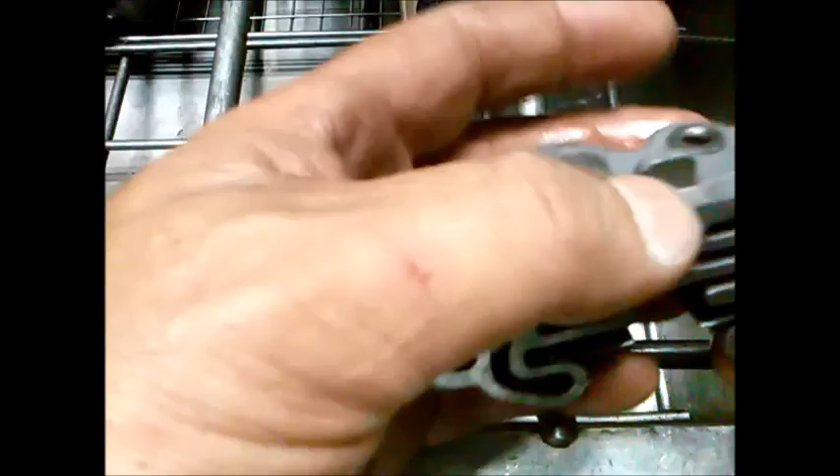Okay, we've got the governor valve now.

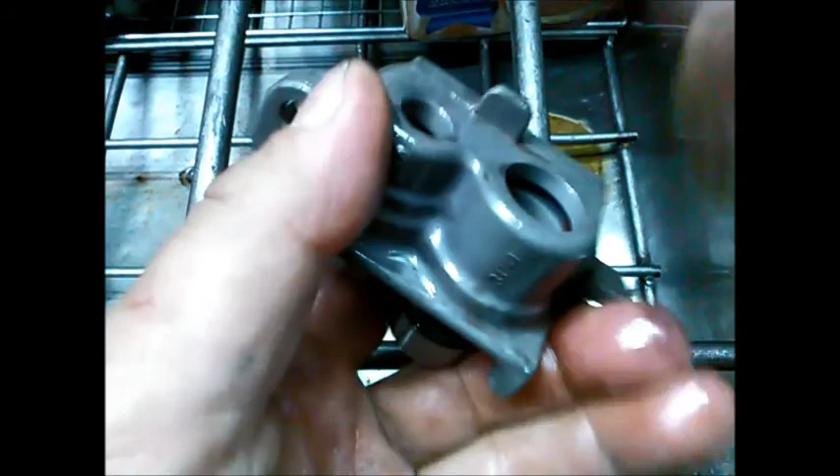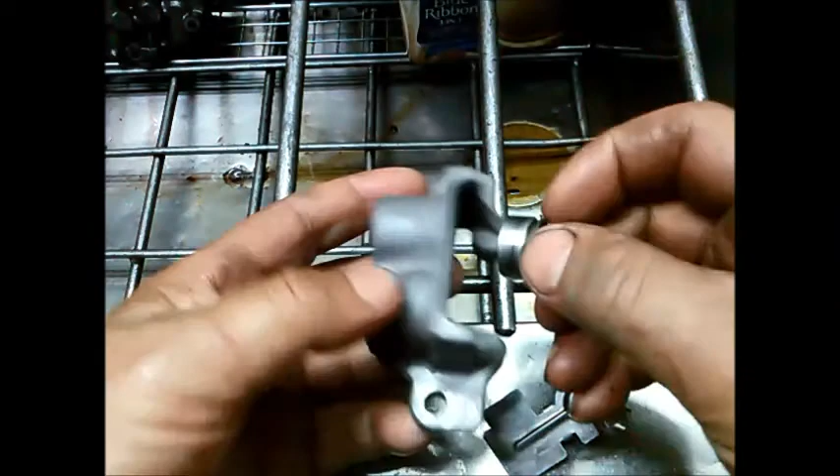Okay, I've washed the governor valve, and we've made sure that's nice and flat as well. We're just going to put the valve in backwards and just see how it travels.

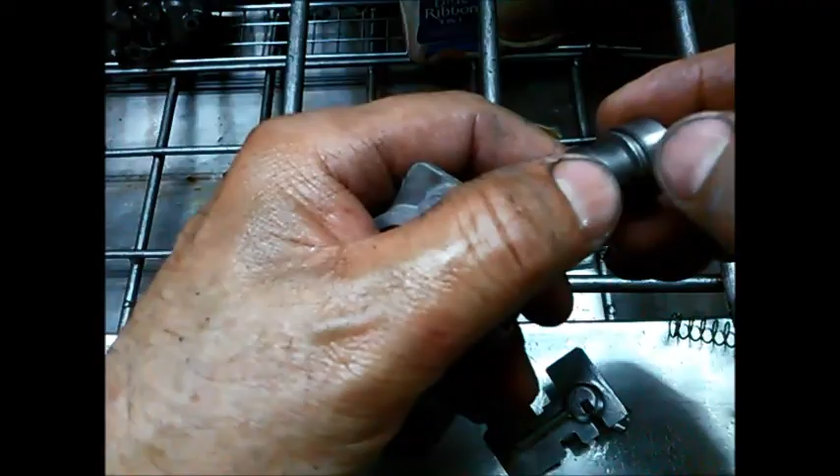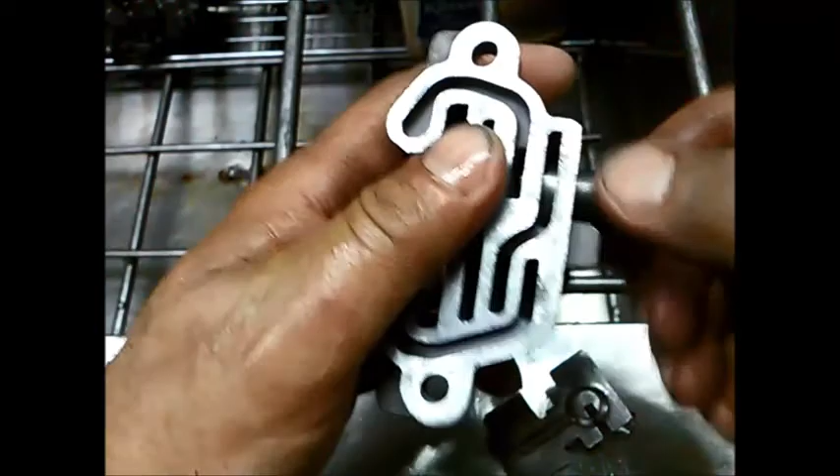There's a little bit of resistance there, so I'd say there's a little burr there. This little edge here makes a little burr on the inside, so it's important for the valve to knock that burr off. And there we go, let's see, it's going much easier now.

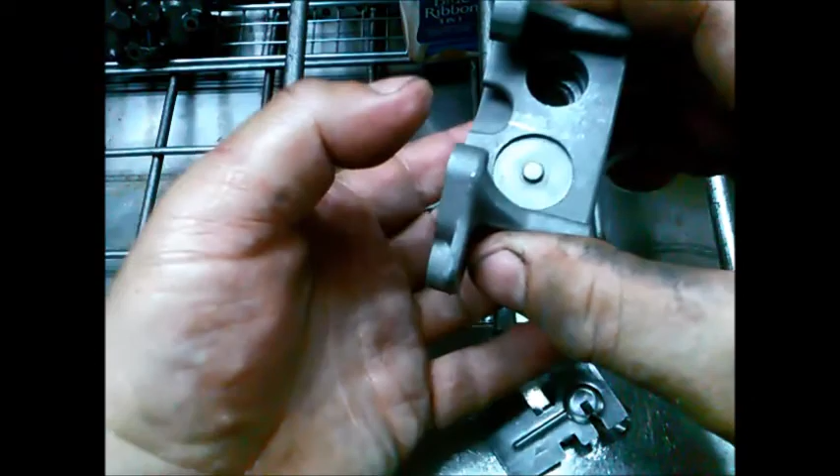Now that valve doesn't come out very far. You can see where that plate comes up to, so it only comes up to about there. But it's very important that it's got nice sharp edges there. If you end up knocking that off, I've heard of people getting a bit of sandpaper or wet and dry and cleaning it up if it's sticky.

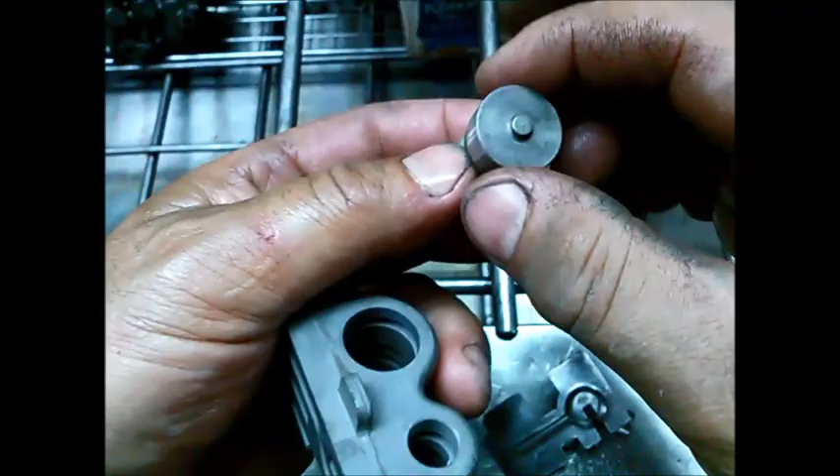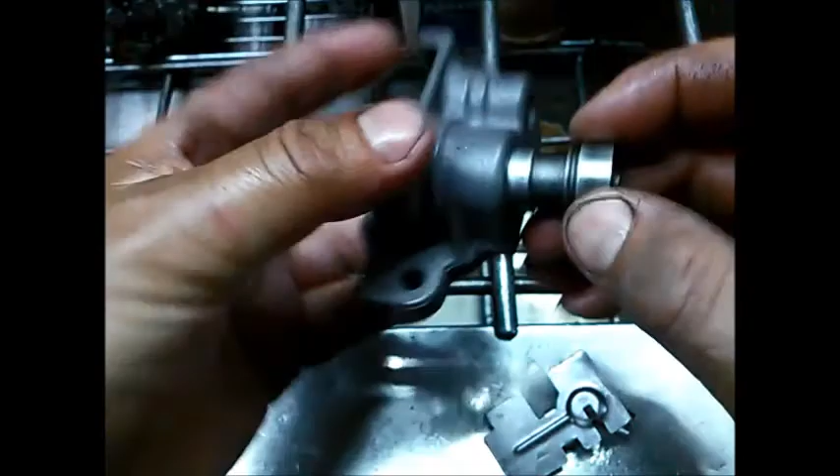That's the incorrect way of doing it. You get some very, very fine grinding compound, and you just put a little bit on the valve together with some solvent, and you work it through. But it's even better to not use any grinding compound, just work it through on its own step there. You can see it's a precision fit, don't force it in.

That valve's really good. Now we're just going to do the other one, that's the secondary valve. Same thing.

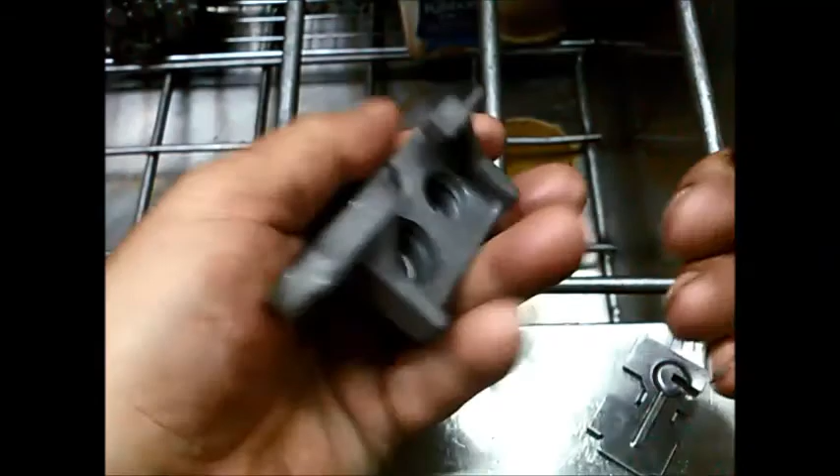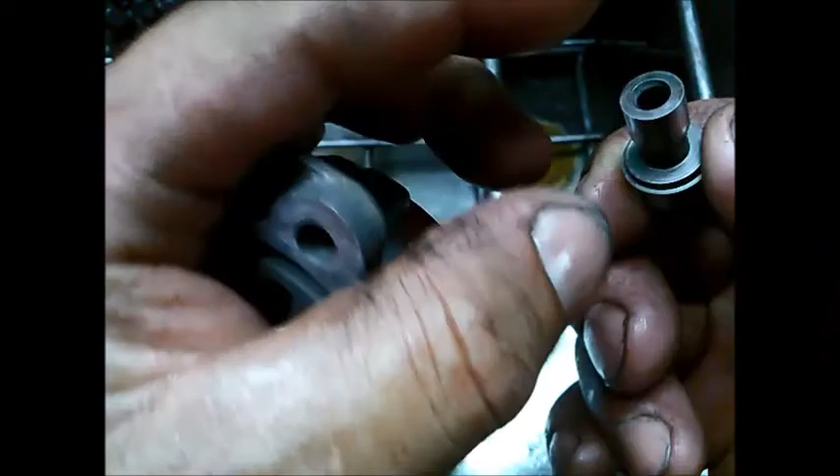Backwards. On this one, you can actually see where it's working, where it's worn there. The valve doesn't even travel all the way to there. So this edge here, where my fingernail is, is critical, and that sharp edge there, so it's got a nice sharp edge, so it'll have a cleaning effect as it's working through the bore.

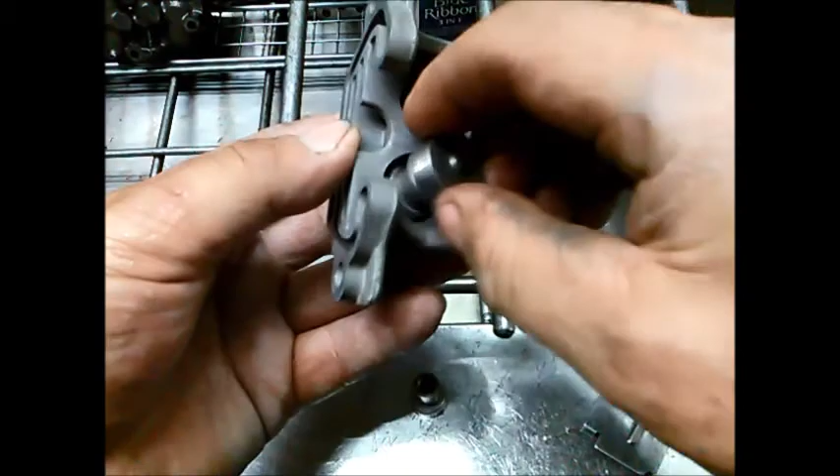Very good. Put it back together now. A little bit tricky to get that spring through.

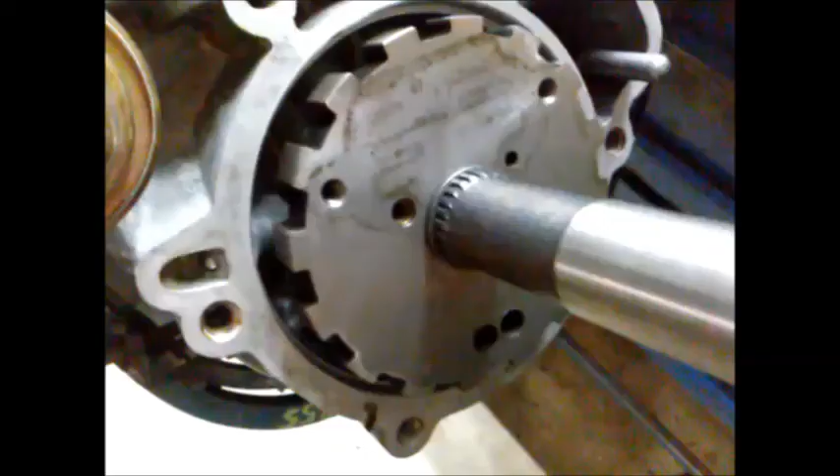Okay, now we can put the governor back on. I've put a little filter in there as well, don't forget that, if it had one. And we put the governor back on.

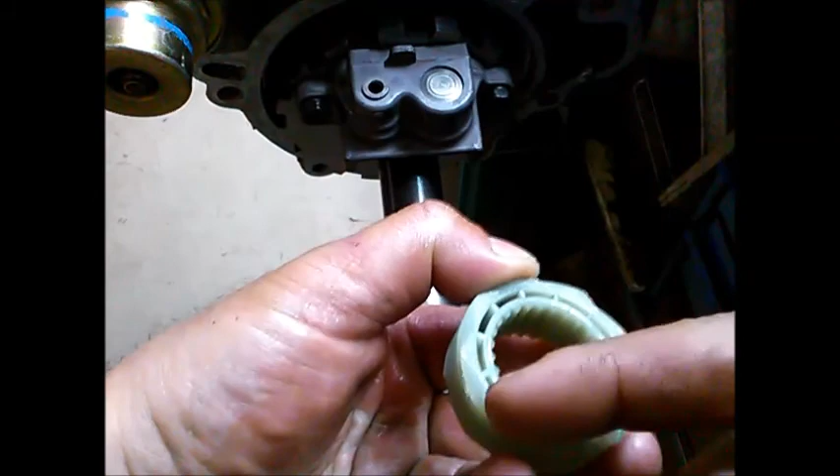And we can put the Speedo Gear on as well. This one's got 9, I think it's 9 starts. 1, 2, 3, 4, 5, 6, 7, 8, 9. They also come with a yellow one with 8 starts.

Now, with these gears, you just check it, because this is the drive gear, the drive one that drives the gear on the Speedo cable. You want to make sure that that's nice and flat. When they wear out, they'll have a little dip in them like that.

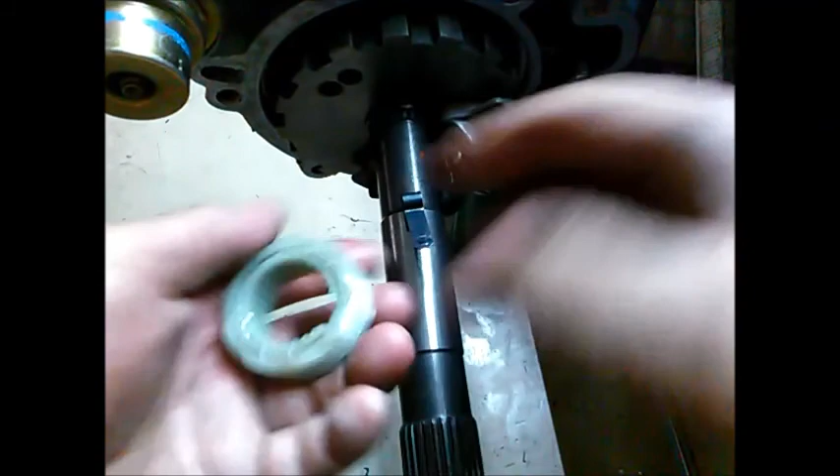There's a little hole there, and I just like to bend this clip out a little bit just so there's more tension on it. There you go.

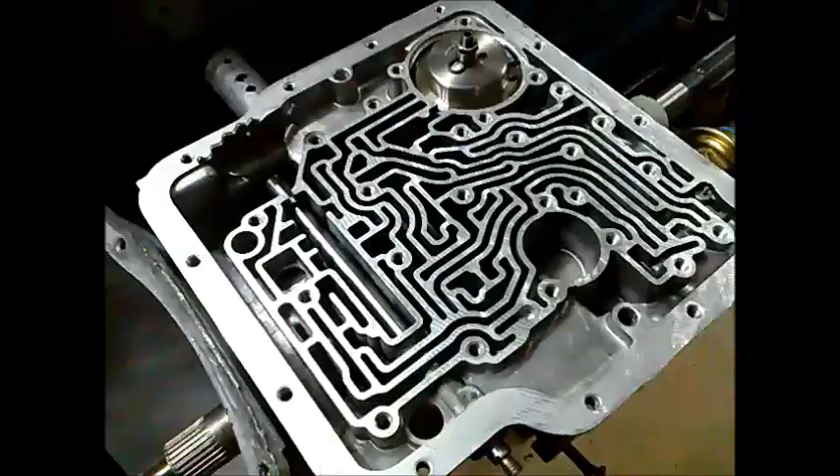Yeah, we've also got this test plate we made up years ago, or Dad made up. We can put this on and just test. You can see it's got different locations: your second clutch, third clutch, rear clutch, governor valve and servo. So we can bolt that on there, which we'll do.

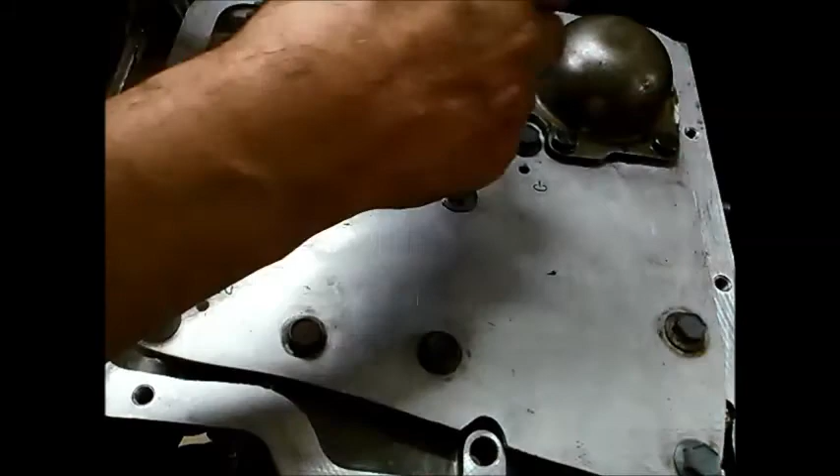Now we've got it all bolted down, including the servo cover. You can hear the second clutch, third clutch, reverse clutch, servo, or the band.

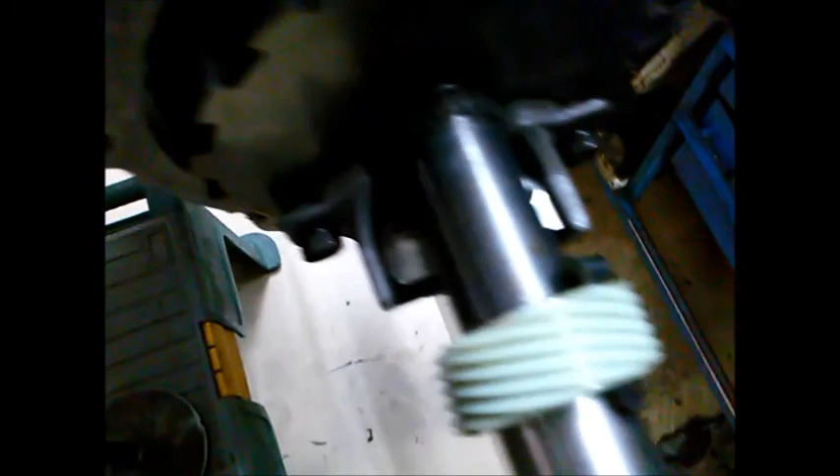And we've got the valve, the governor valve. Can't really see it, but you can see it moving up. There, bit hard to see. I haven't got good lighting here.

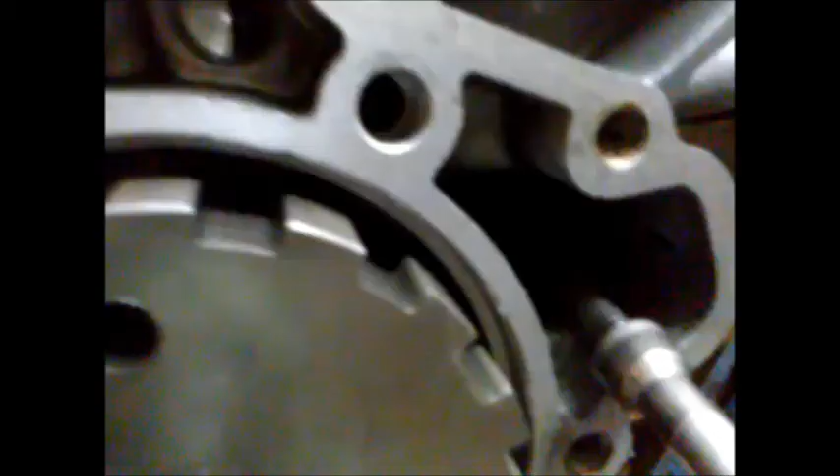You'll see the back there, we can see the band applying. So it's all good, we know it's all sealed up pretty well.

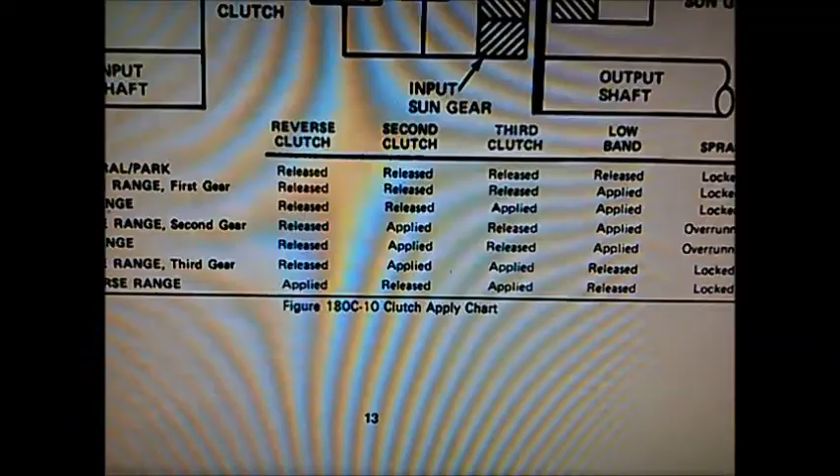And again, I've got the ADG manual here on the Trimatic, and it just shows which clutches and band and sprag when it's overrun or locked up in all the different gears.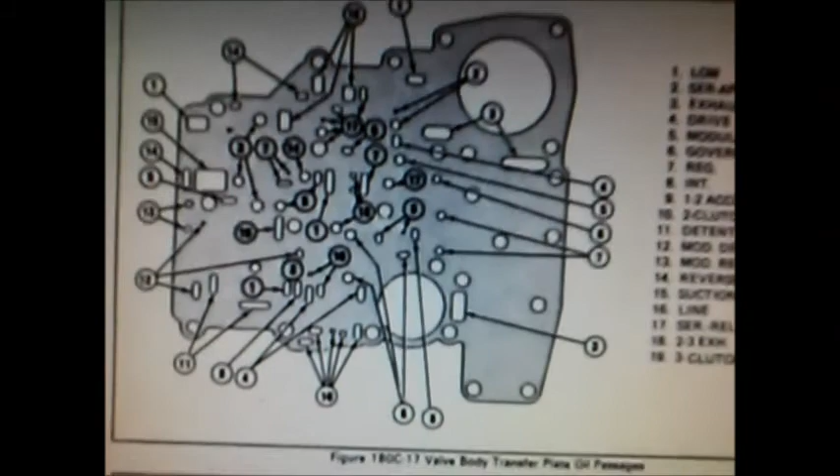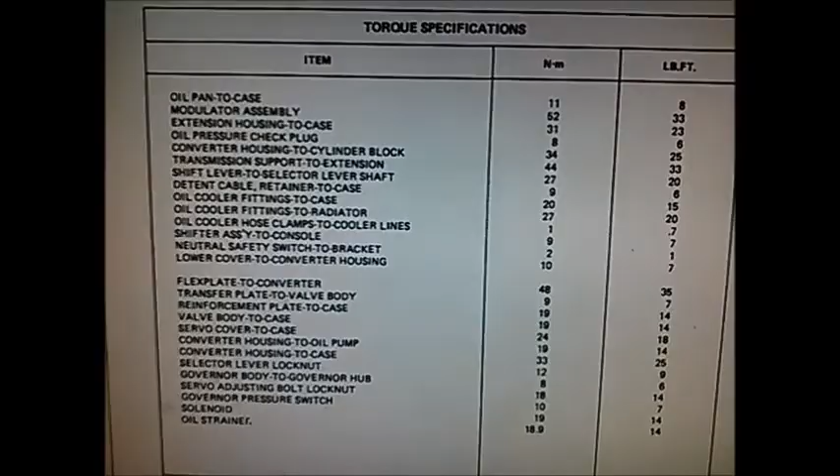And there, the little worm trails on the case. And there we have the torque specifications for it.

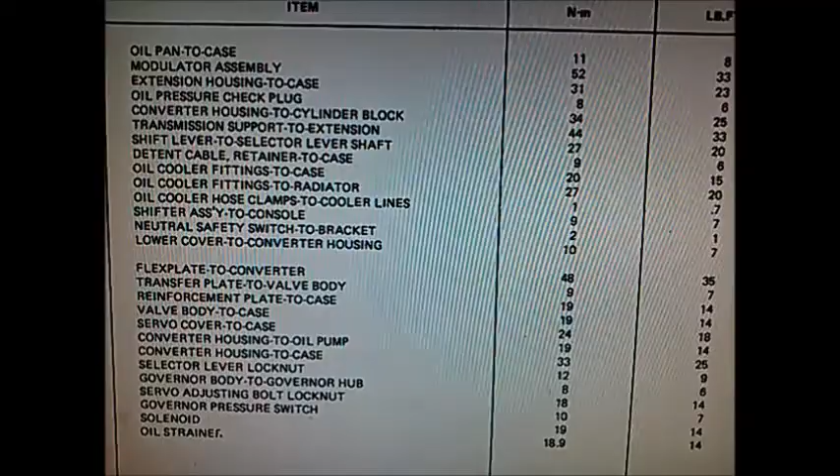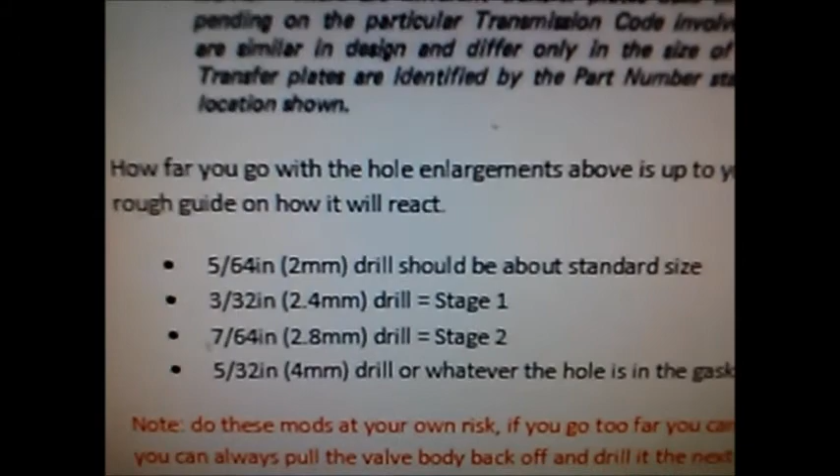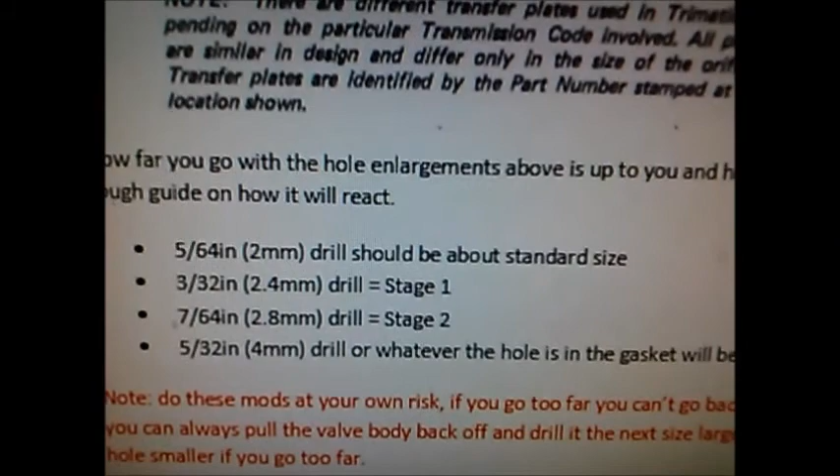Now there's a little modification you can do on our separator plate. We've got the 5/64-inch holes, which are 2mm. We're going to actually drill those out to 3/32, so about 2.4 to 2.5 mil. That'll increase the harshness, or it'll just make the gears change a little bit harder.

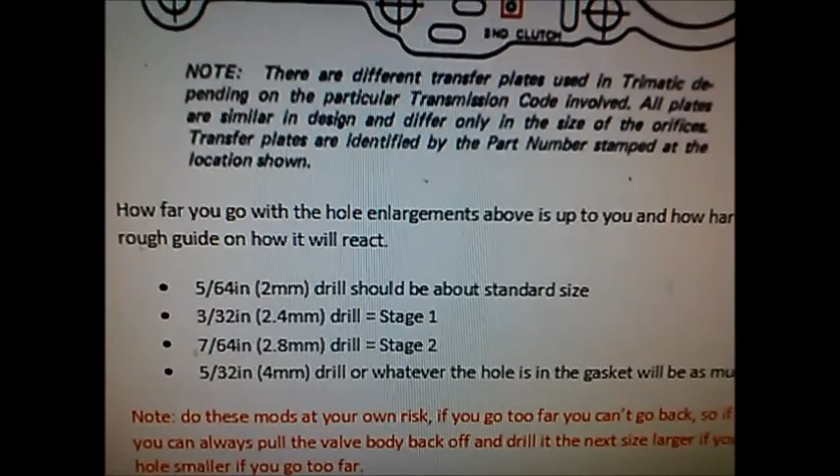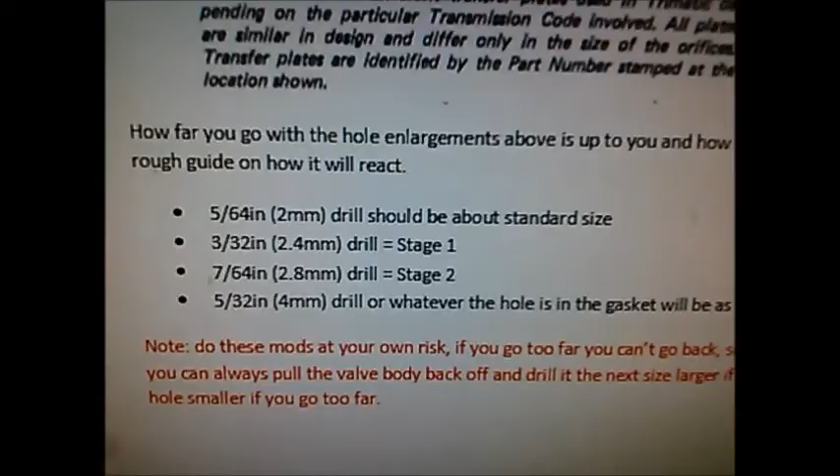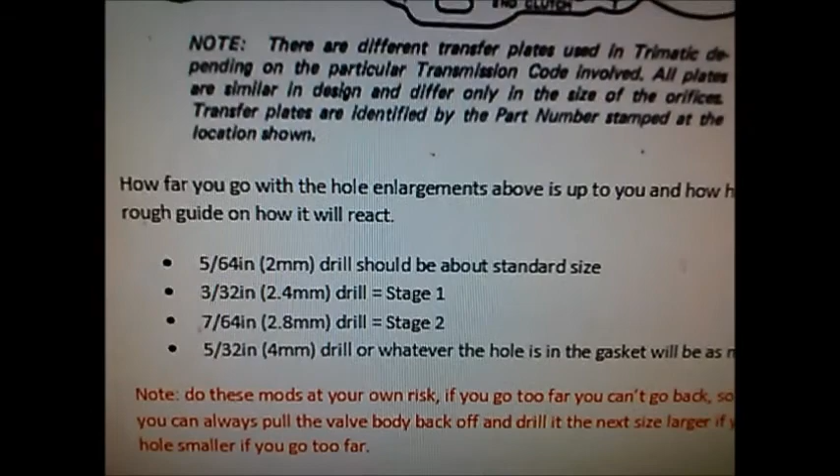Our customer doesn't want it to go too crazy. He wants to be able to still drive it like an automatic on the road. So we're going to go for the 3/32. But as you can see, it gives you a warning about increasing those hole diameters too much. Things can start to break, and depending on what you've done to your transmission, it can completely affect the shift quality.

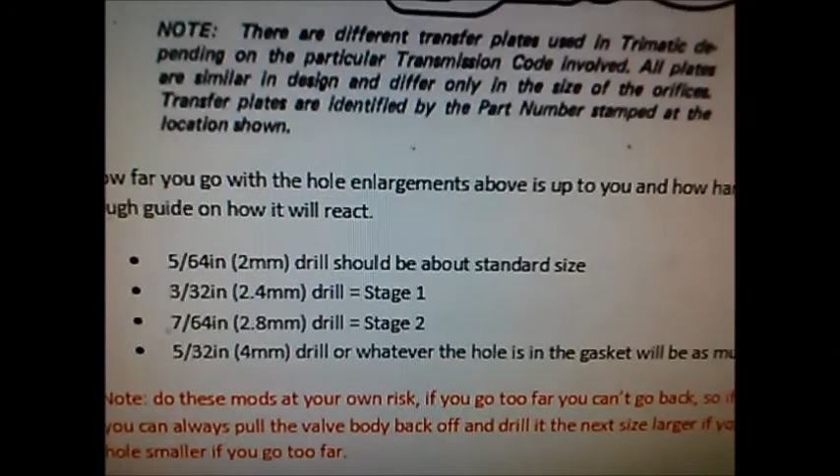I wouldn't recommend going past stage 2, but I have heard of people drilling them right out to the maximum size, which is the size of the bore, which I think is 5/16 actually, or 1/4 inch. So 1/4 inch is 6 mil.

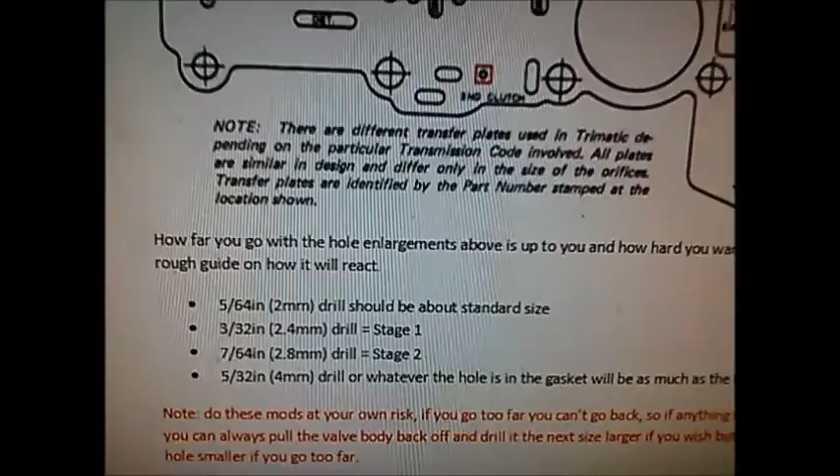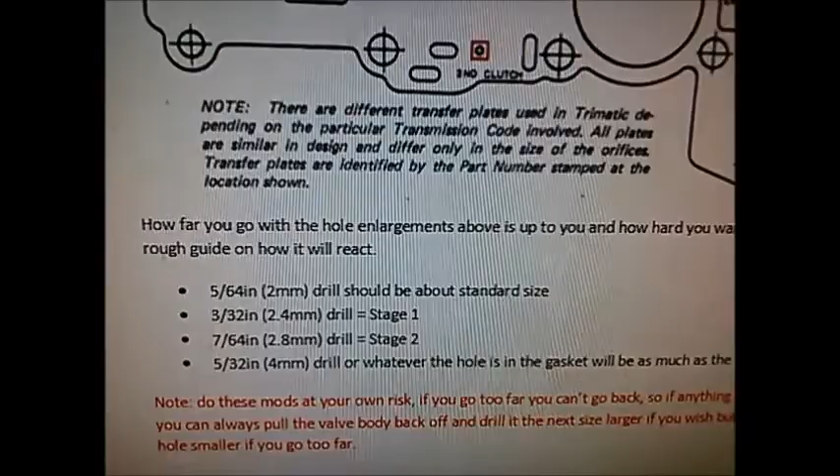I'd be very interested in seeing if those transmissions last under those sort of applications of the clutch packs. But anyway, just for your own interest, there's a little mod for you. It'll make it shift a little bit harder through the gears without modifying anything else. You don't have to do any of the other work that we've done to beef it up.

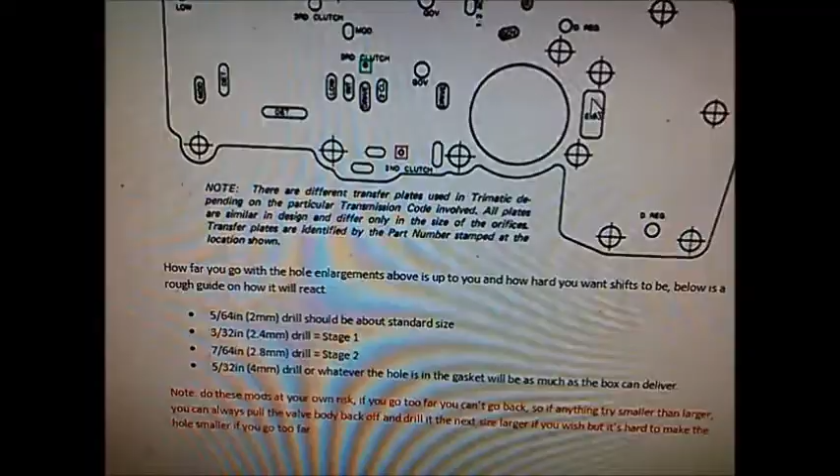But you do need to remove the valve body and the separator plate to do this job. And if you increase it too much, you'll see that's what will happen - you'll get a crack in the servo piston and it'll just blast it right out. That's why we've put a steel servo piston in. But of course, that's a weak point. When you improve a weak point, it just shifts a weak point to another location. So keeping that in mind, you've got to be careful in what you do and what you modify.

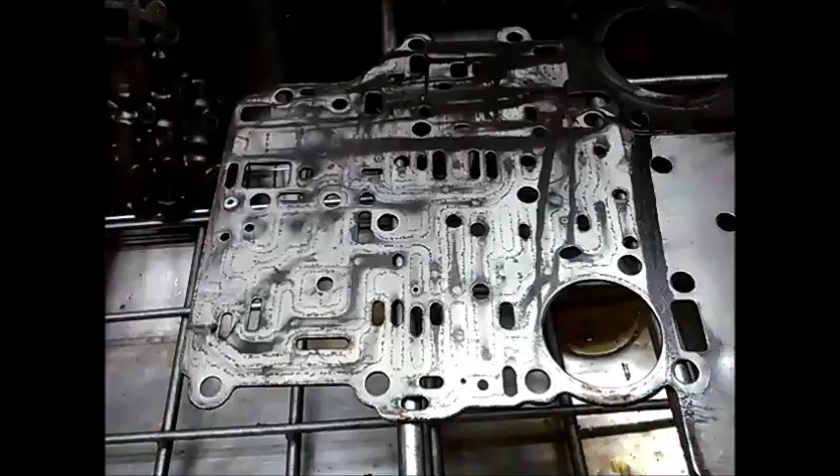Here we've got our separator plate. What somebody's actually done, they've pop riveted one of the holes here and got rid of the little check ball in there. If you look back on that diagram, you'll find that what they've actually plugged off there is the reverse, and this one's low.

So the holes that we're going to actually drill is this one here. Under this separator plate there's a little check ball, so this one here will be drilled out to the next size, and that one there. On some separator plates there'll be another hole there as well.

That's the factory size. And also you can see when you're drilling that port out, you can see where it sits on the case there, or the valve body where it sits. So you want to just try and drill the hole on that side, so you're not actually drilling into where it's sitting on that little wall there.

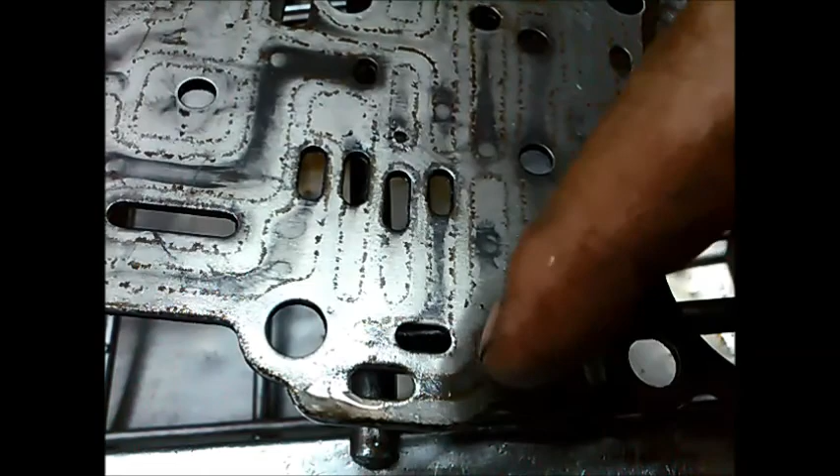There we go, you can hardly see the difference, but we've drilled out the second one. We're just going to hit the stone on that, take that burr off, and then just drill it again just to clean it, in case we've pushed that burr back in there. Or we can just do it by hand - I think I'll actually do that, just get a slightly bigger drill and put a slight chamfer on there so there's no burr or anything that can fall in.

Terrible lighting here. Whenever I put my hand in front of the light, you can't see anything on the camera.

There you go, that's nice and level.

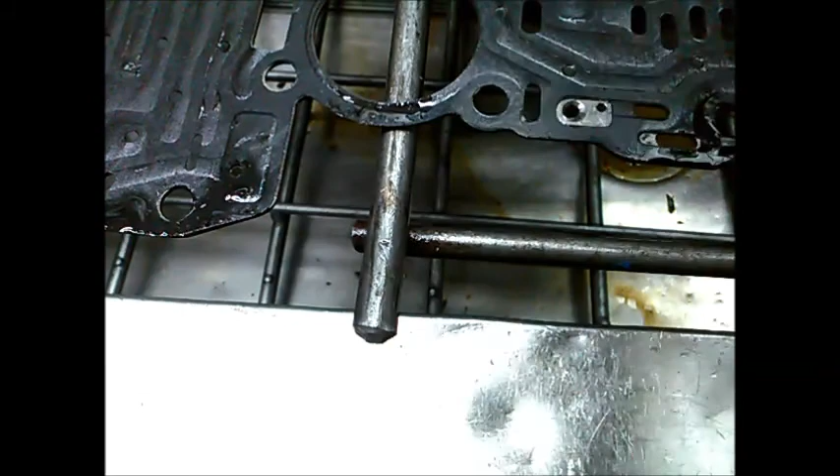I'm going to replace this gasket as well. You can see where that check ball's been hammering, it's nearly gone all the way through there. So we're just going to level that up as well, and make sure that check ball seals properly. If that doesn't help, we're going to have to get another separator plate.

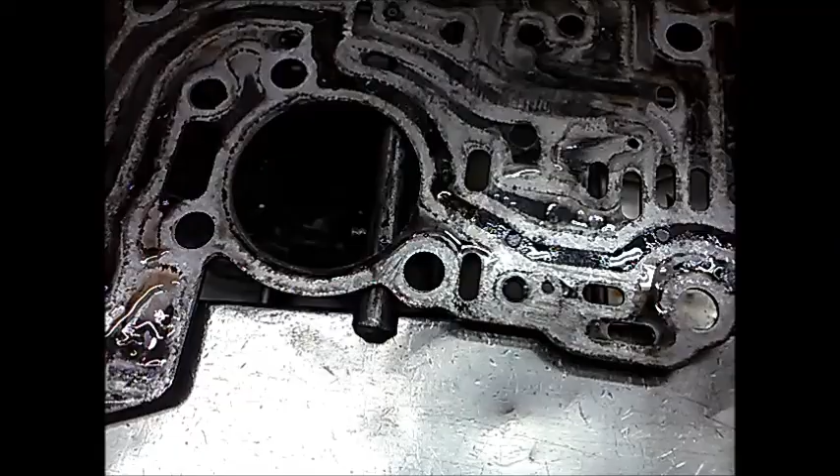Okay, we've got the valve body here now. I've still got the gasket on it. Whenever you're changing these gaskets, always make sure that you test the gasket on the separator plate, and make sure all the holes are open everywhere they need to be on the separator plate.

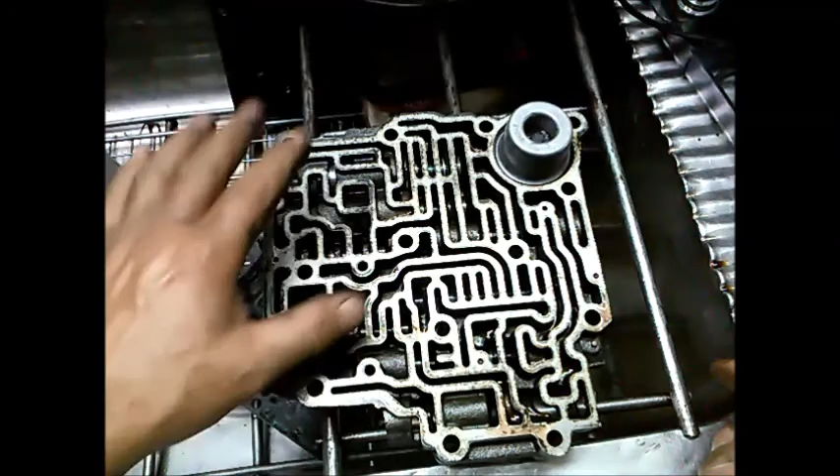Okay, so we're just going to give this a clean up before we disassemble it, clean it and blow it all out. It's just a matter of slowly, one by one, going through all the valves, taking them out, washing it up, and making sure that it's floating properly through the bore.

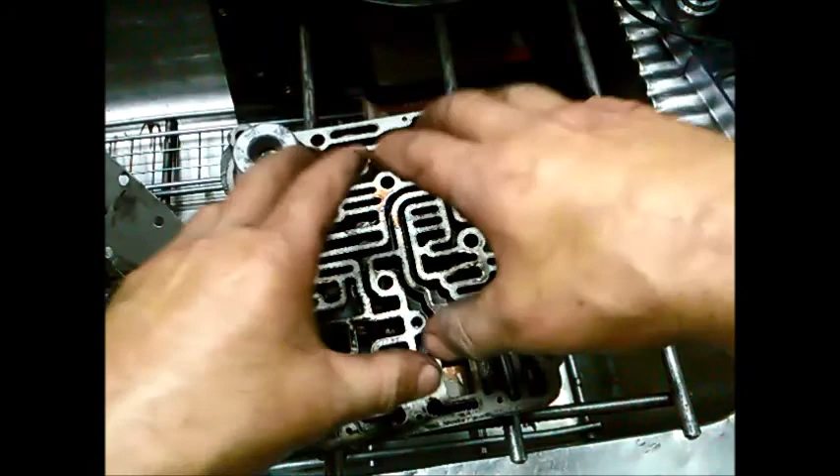These valve bodies are very good in that they're like a cast valve body. You don't often, very rare, that you'll have a valve that's seized up or locked up in there. They can seize up when you get all that muck, because that's actually the top side of the valve body, and as the muck sort of accumulates in there, it can seize up the valves, but generally speaking it's very rare for them to seize up anyway.

They're a nice sharp valve. The edges are nice and sharp. They have a flushing effect. It's a good solid material, so you don't get the warpage like you do in the alloy valve bodies. And anyway, that's what we're going to do.

I won't, the video's getting on a bit, getting quite long, but I'm just going to clean it all up, like I said, and blow it out, clean it up as clean as I can get it without disassembling anything, and then I'll take the valves out one by one and clean it up.

Okay, we've gone through the valve body, cleaned it all up. We've left the accumulator in there. Sometimes people like to lock them up with a washer in there. We haven't done that, so we've left that the same.

And we've gone through the separator plate, and we've just made sure it's nice and flat. We've run a stone over that and tested it with a check ball. It does seal okay. And we've made sure that pop rivet's sealed properly.

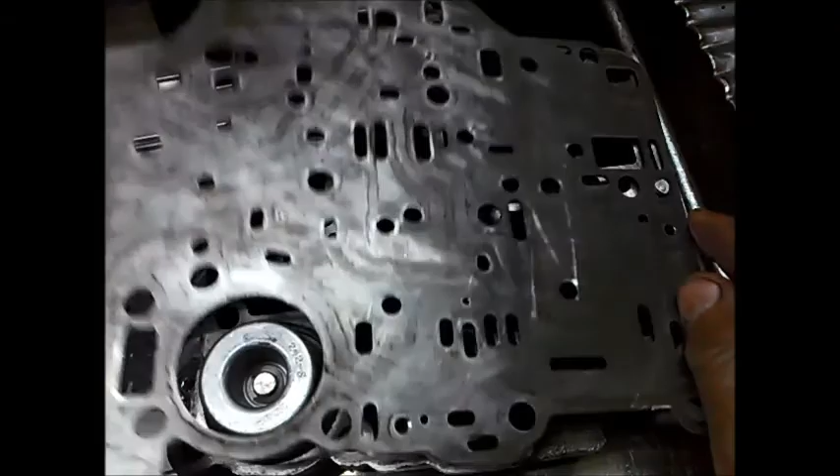Sometimes when they punch them out, the hole isn't punched out properly, or it's a slightly varied separator plate, and you might find that the slots are slightly different. So it's always good, you can cut it out, but you want to make sure that all those holes are clear. Unless it's into a spot that doesn't do anything, like into there, that wouldn't matter because there's nothing working there. Same as over here, and along there. So you just want to make sure that all those holes matched up, and go from there.

Okay, we're going to put the check ball over here. Just going to give those valves a little bit of a squirt of oil so they don't rust up.

And we've ended up putting the gasket on the underside there and confirming that all the holes are clear.

And I've got my little guide pins that we've made up. That's alright in that one there.

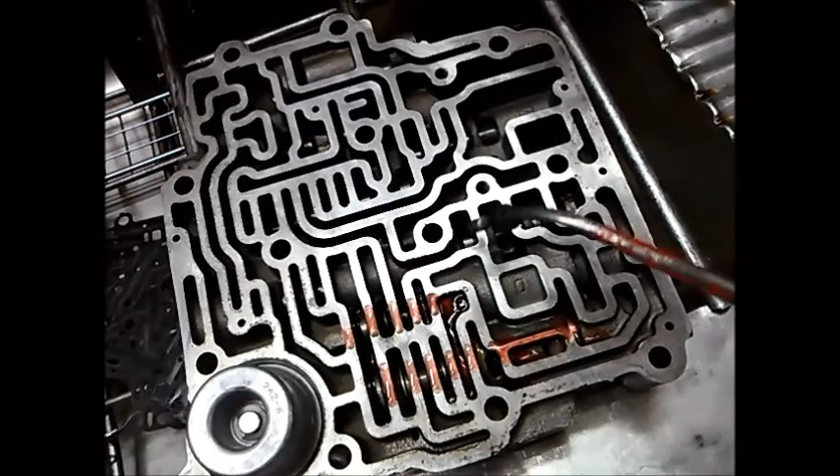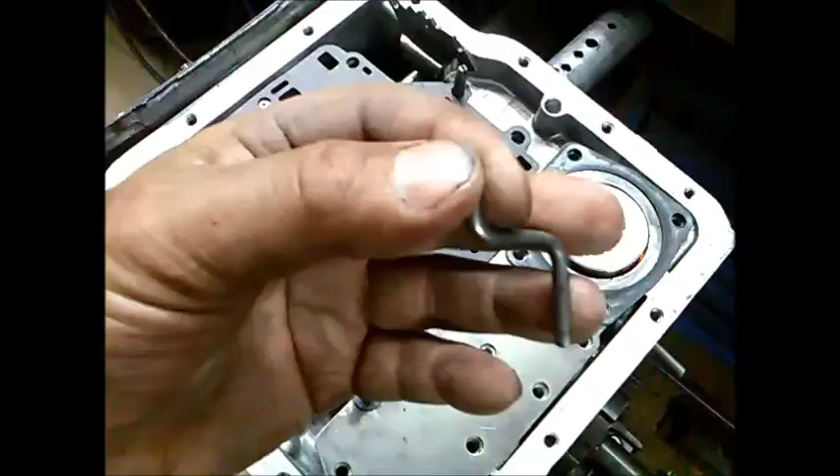The short bit goes in there, so I like to put it in the valve. Some people like to put it in there and then guide it into the valve, but anyway, we'll see how we go.

We've got the valve body on, with this modified plate. What we do is use a special drill to countersink a groove in there and put an O-ring in it. That stops it leaking on the kickdown solenoid, eliminating that problem.

We've got the servo cover on. Now we're just going to put the filter on and the extension housing. Had to replace the bush and seal on the output shaft, or extension housing, and the job's done.

We had to replace the solenoid because we tested it and it wasn't working, so we've done that. We've also got our modified plate bolted down, made sure everything's okay. Just got the filter to put on now, and don't forget the gasket.

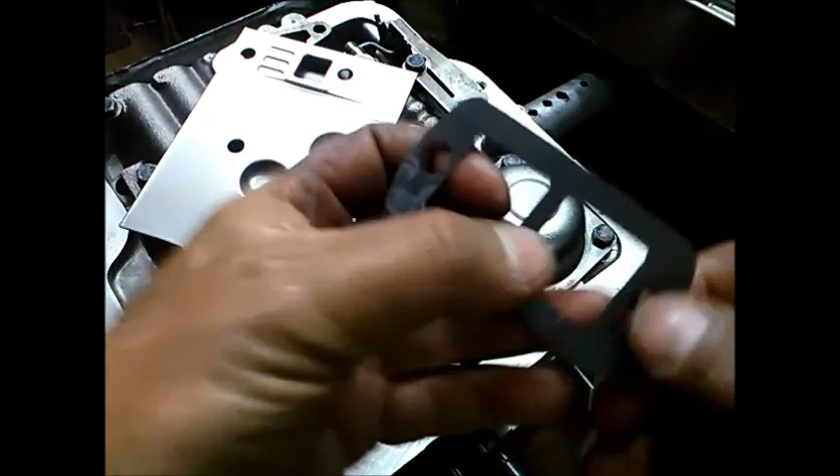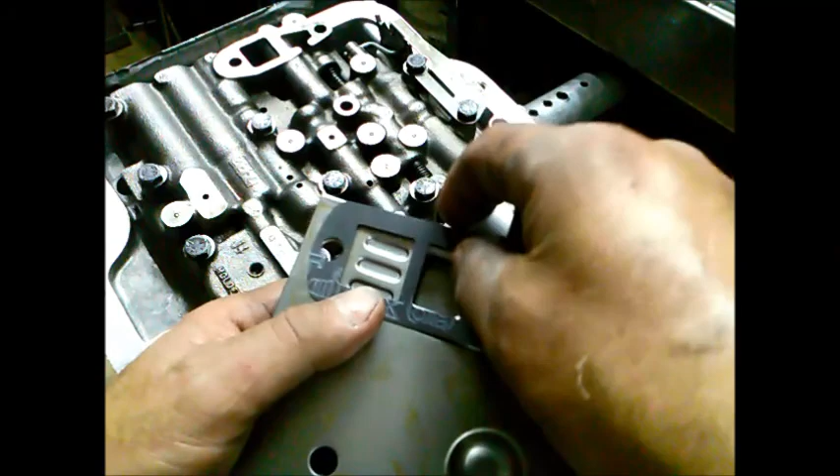With these gaskets, there's actually a type that has one side blocked off. The new gaskets have got two holes so you can't mess it up like that. But if you end up putting the wrong side on, it can block up the filter.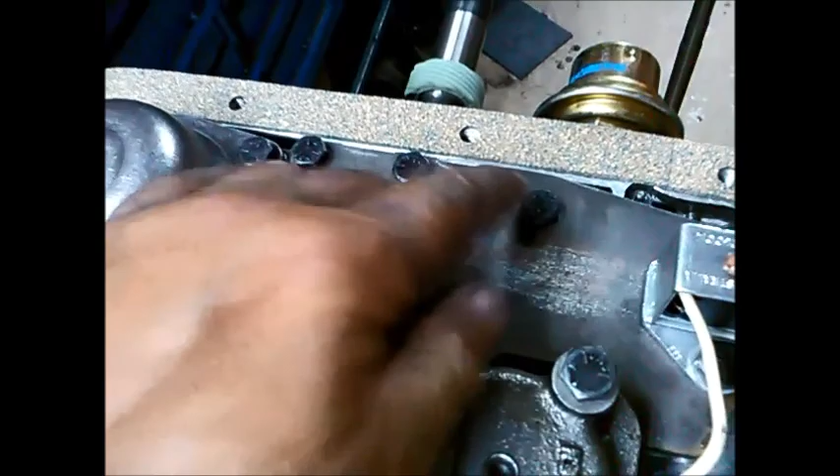Going to pop a neodymium magnet in, and I'm just going to stick it on here so it's got as much surface area exposed to the oil, which will be better. Stick it on like that, and you can see it's holding on pretty strong, so it's not going to fall off. That sits about where the modulator is, so it's not going to be in the way of anything.

I'm just going to knock out the bush. I've taken the seal out. We've got our little driver there.

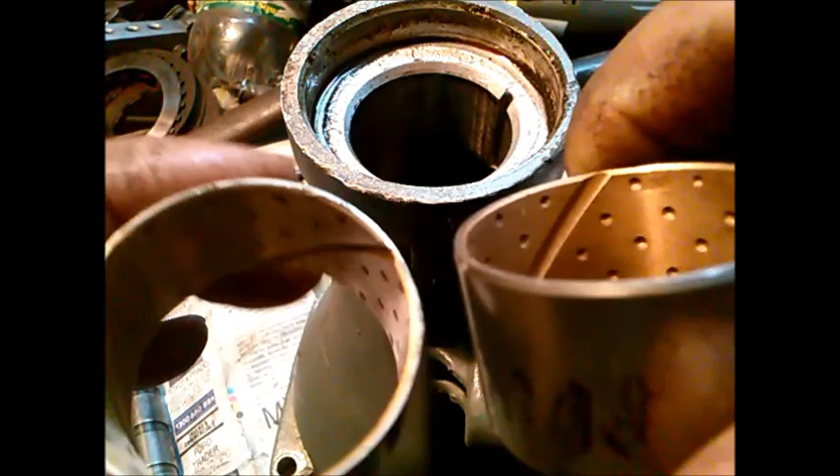There we go, the old bush, and we've got the new bush. Just going to give this extension housing a bit of a wash, and then we'll drive the new one back in.

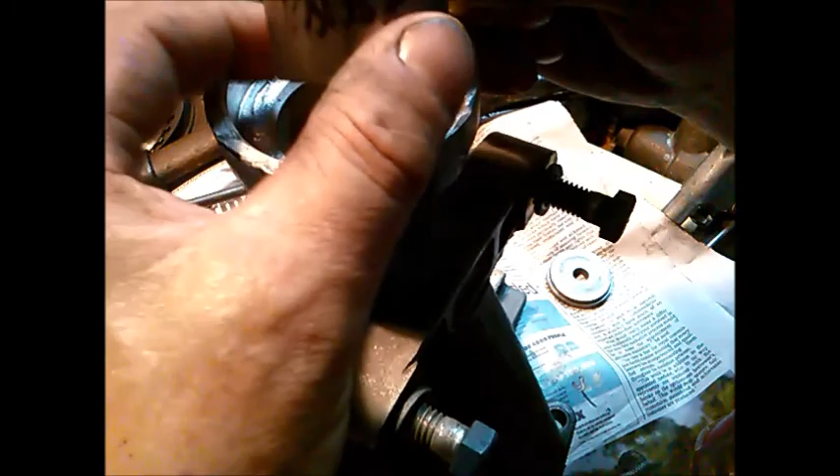Okay, I'm going to put the join - you can see where the join is on the bush - up at the top, and that should have the lubricating grooves on the bottom, at about 2 o'clock and 10 o'clock, on this particular bush anyway. And I'm not going to drive it in all the way, I'm going to leave it sticking up above the chamfer, just to keep it closer to the yoke.

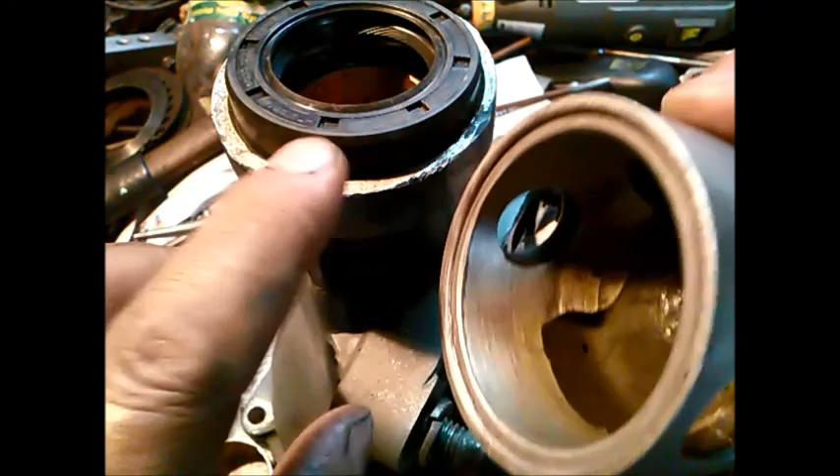There we go, and you can see it's a bit more raised. And I've got the seal, and I've got this old piston as a driver, which has just got a little step. What that does is it won't push it all the way down, and hopefully the lips will be sitting at a new spot on the yoke. Usually they wear a little groove there on the yoke, so we try to put them in a different spot. With these you can't drive them in any deeper, so the next option is to have it out a little bit.

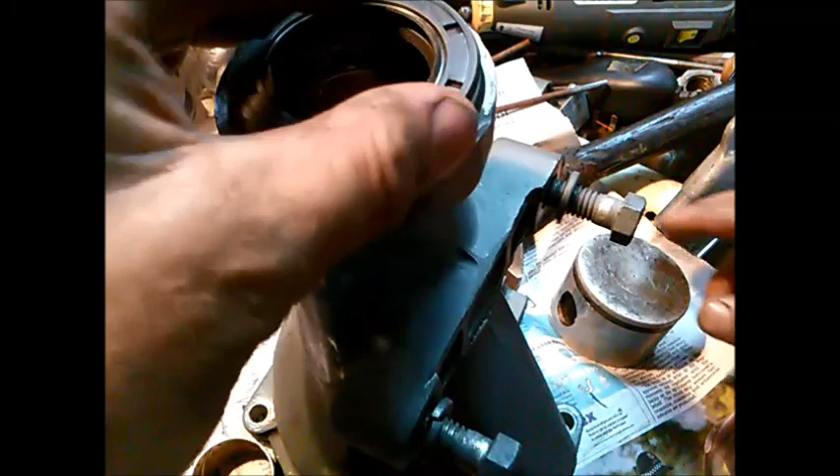You can hear it's got a slightly different sound, and there you can see it's raised just a tiny little bit, and there you go.

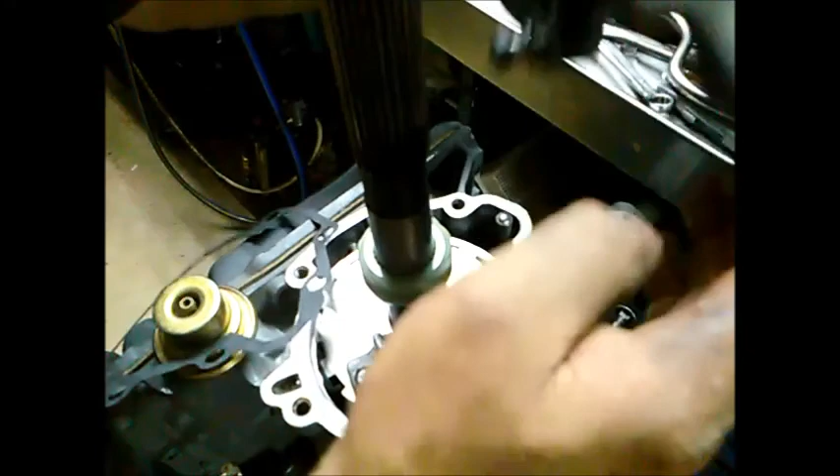And I've put the parking pawl back in. You can see it's spring loaded. When this rod here pushes in, that'll push it into the parking slot. And don't forget the gasket.

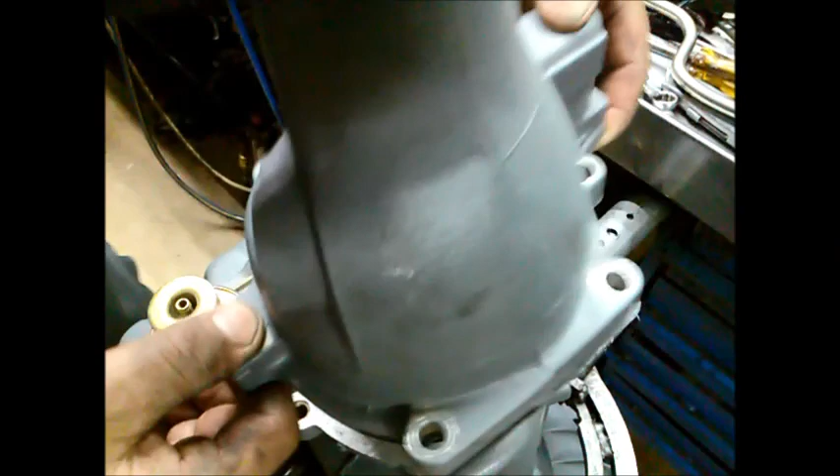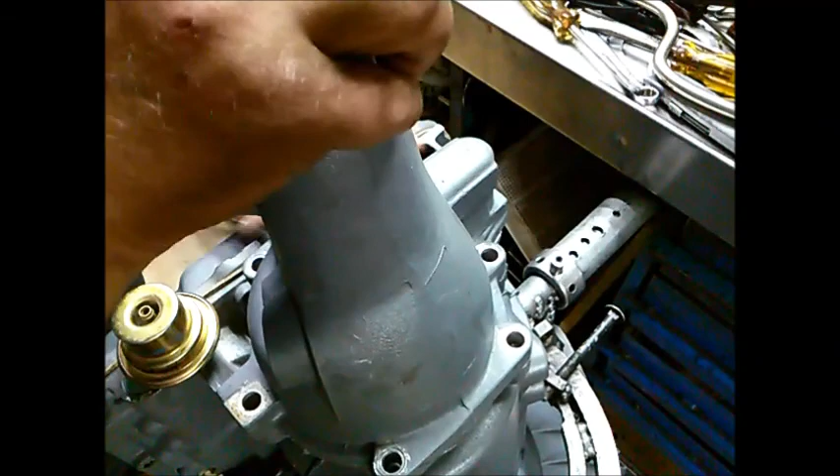There we have it. We've done a couple of little mods on there: increased the capacity of the clutches in the third and second drum, increased the pressure in the pump a little bit. What else have we done? Put the pop rivet on the reverse in the separator plate and drilled out the third and second clutch pack apply, just going to the next size up.

There we have it, and the high stall converter. I hope that's shown you a little bit. Of course, you don't need to do these modifications, you can keep it stock standard, just make sure everything's clean and go through the process. You don't have to do those modifications if you don't need to or want to. Anyway, I hope that's helped you a little bit. Thank you for watching.